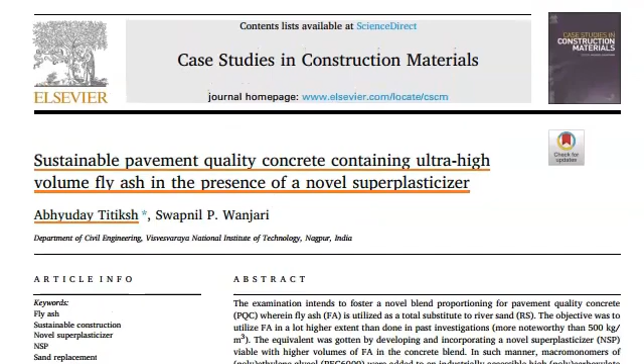Excellent, very good. Based on my initial thought with you, I think you have developed some excellent admixtures and use of fly ash, and you are also holder of one of the patents. So I'm very excited to know more about your research work and what you've done in the past. Maybe the best way to start is to give me an overview of what your research subject is all about. What do you do, and what does it cover?

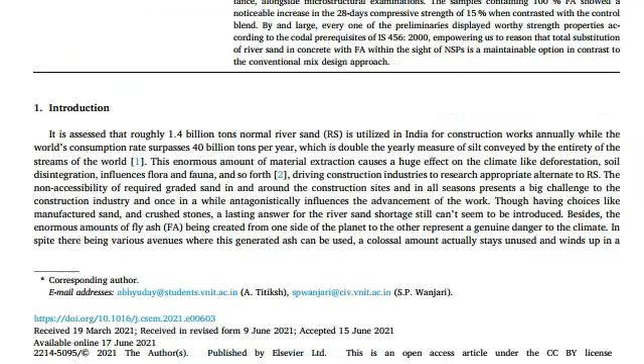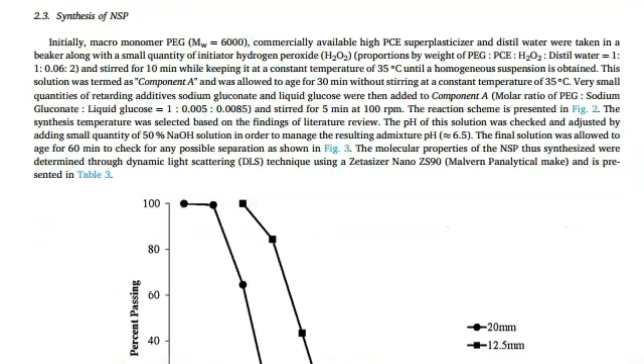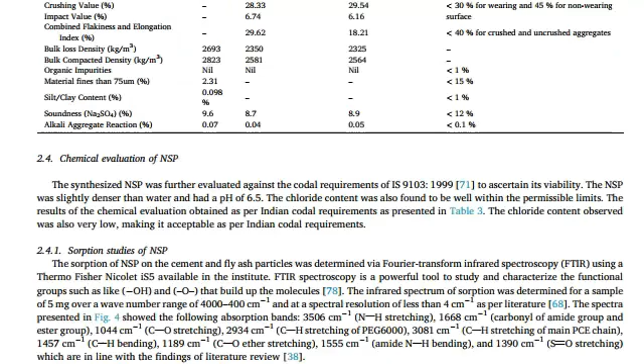To start with, you need to understand why I picked up this research idea. Many studies in the past have focused on incorporating supplementary cementitious materials, waste materials such as fly ash, GGBS, rice husk ash, and so on. But all those studies were either done by replacing the traditional ordinary Portland cement used for construction, or they failed to achieve the necessary strength requirement of concrete. So there was a general remark that if you replace traditional cement with these supplementary materials in a larger proportion, you will not get the required strength.

Then came the age of geopolymers, which was a revolutionary achievement at the time. But the practical aspect of geopolymers is still a bit blurry. Geopolymers are pretty costly, and the chemicals used for the geopolymer activator solution are a little hazardous. So when we address the practical applicability, the feasibility of this idea gets slightly contorted.

So my aim was to incorporate fly ash and bottom ash, which is a byproduct of thermal power stations in India, and not just replace cement in the traditional concrete mix, but address the issue of sand scarcity.

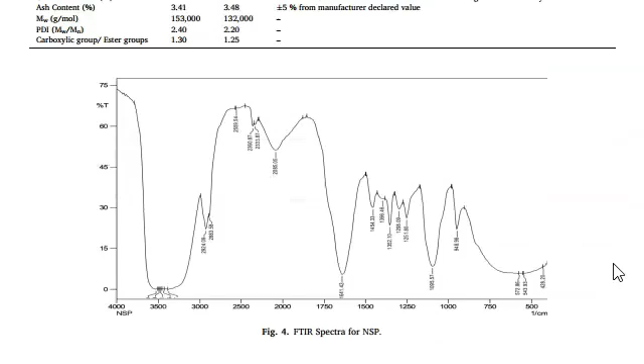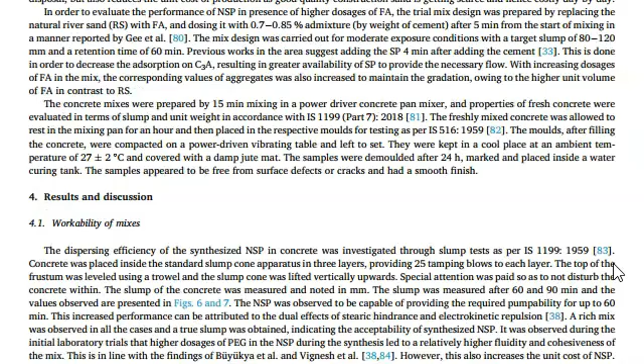In India, and I'm pretty sure this is implemented worldwide, for the past 10 to 15 years the Supreme Court of India has banned river mining because it alters the natural flow of rivers. Because of this ban, the cost of good quality construction river sand is rising rapidly, which led to illegal sand mining, the generation of sand mafia, and so on. Ultimately, there is a scarcity of good quality construction sand, which led to the increase in its cost.

On the other hand, huge quantities of waste being generated in India were still being dumped in landfills and so on. That needed to be addressed, because landfilling is not a permanent solution, as it leads to various environmental hazards. So I tried initial lab trials by incorporating fly ash and bottom ash in a traditional concrete mix as a replacement of natural river sand.

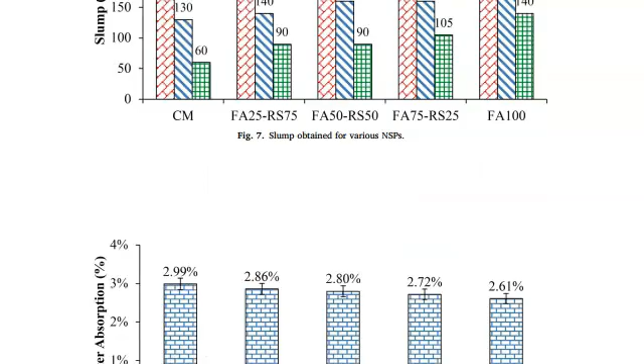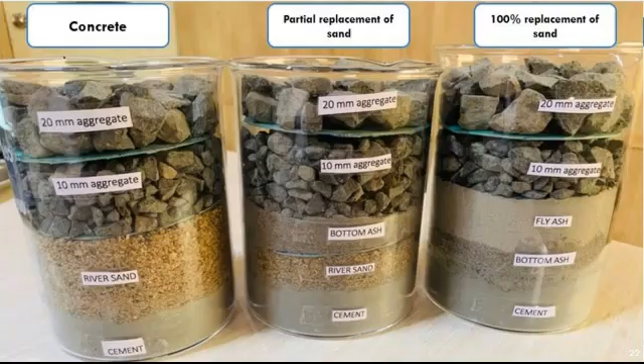But as observed in past studies, when I carried out the replacement for greater than 50% - meaning 50% of sand was replaced by ash - I observed a stagnating decrease in the overall strength, which motivated me to analyze the effect of admixtures. Admixtures are chemical compounds added to concrete to enhance its overall properties, both in the fresh state and in the hardened state.

So I analyzed multiple products commercially available in the field, evaluating them in terms of both concrete performance and chemical structure. I realized that if you increase the dry material content, or as we commonly call it, the solid content, of any polycarboxylate-based admixture, PC based admixture, its performance gets increased multifold. That's how the idea of my research came into practice.

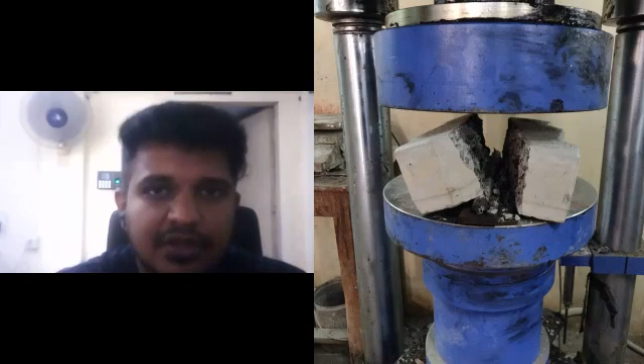I developed a new superplasticizer with a very high solid content that is not available commercially in the market. This admixture was then added to a concrete mix containing very high amounts of ash. In my mix design, I incorporated around 500 to 600 kgs of ash per cubic meter of concrete, which has not been achieved in the past in a commercially feasible manner. Geopolymers have done this, but they were costly.

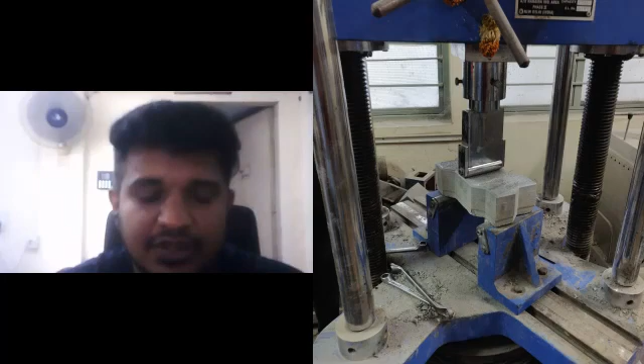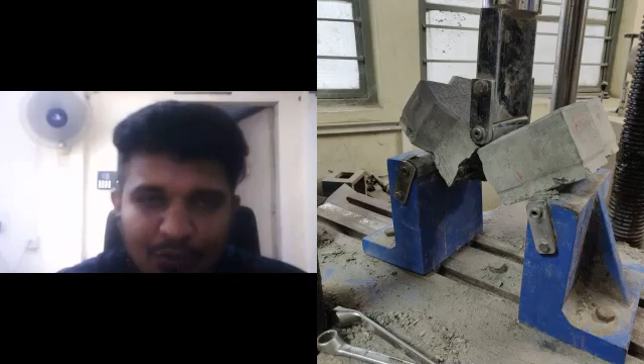On the other hand, with incorporation of my admixture and using ash as a substitute to traditional river sand, the overall cost of concreting was reduced by almost 400 rupees per cubic meter, which is almost 10 to 15% of the cost of concreting. So that's how it came in the market.

And that's very good, because apart from saving cost, it also adds to sustainability. It reduces the waste, and waste can be reused in construction materials, right? Exactly. We are not just disposing of the waste in this technology, we are actually consuming it in concrete in a commercially effective manner too. So it's a win-win situation for both.

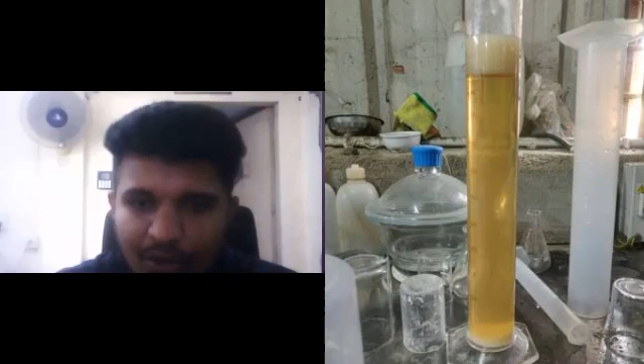The sustainability aspect gets addressed, the practical feasibility in terms of cost also gets addressed, and all it needs is a little tweak. You don't need any specialized machining equipment to develop this mix design. Any RMC plant, any ready-mix concrete plant working today all over the world can implement this idea. They just have to change the mix proportion, mix design, and incorporate a newly developed superplasticizer, or as I call it, novel or new generation superplasticizer.

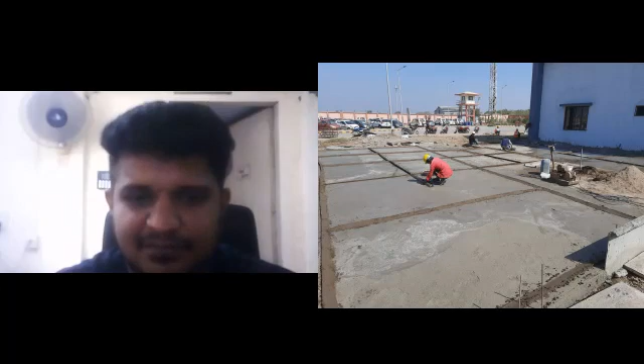So tell me, how did you plan your research? Great idea, I think it will make a big impact on many fronts. It will save the cost, it will actually result in usage of waste, solve a lot of problems, reduce the load on landfills, and provide some downstream economic benefits to the power plants as well. So a lot of good things.

But in a research environment, you need proper planning. So how did you go through the process of identifying the problem, planning your research, and reaching a logical conclusion to your assertions? Exactly. To begin with, I carried out some literature review to find out the gaps I just mentioned: high cost and scarcity of river sand, effective utilization of ash in the country, and so on.

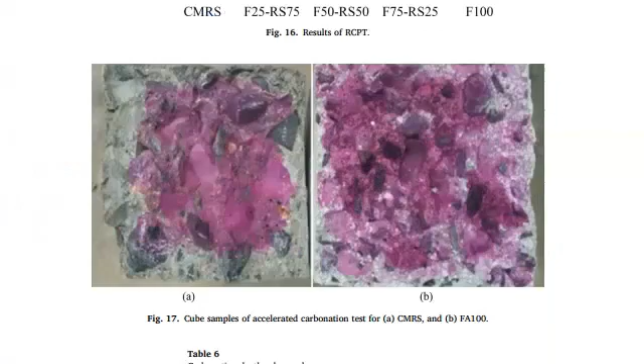So after finalizing the research lacunas, I initially started laboratory experimentation on paver blocks. Concrete M40 grade paver blocks were developed, and as I said, initial lab trials were a huge failure. I was not able to achieve the required strength even after 90 days. In terms of concrete, the 28-day strength is actually the required compressive strength, and I wasn't able to achieve that even after 90 days, which was pretty discouraging.

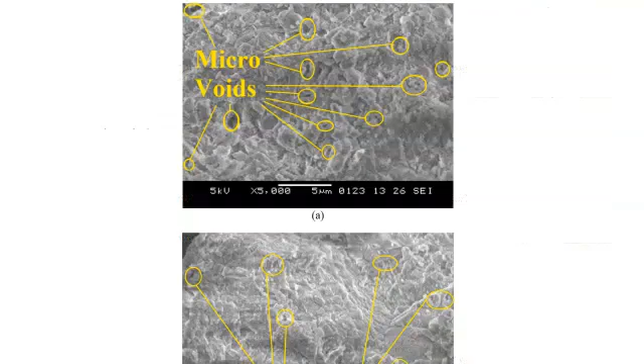But further literature review also revealed some interesting things, that adding certain chemical additives helps. One I'll name is polyethylene glycol, PEG; others are listed in my publication as well. PEG is a very commonly occurring material, also used in food processing and drug manufacturing industries. But if you use heavy molecular weight PEGs, with molecular weights greater than 6,000, these products actually increase the curing potential of the component.

These PEG components act as internal curing compounds when added to concrete, and since they provide curing from within the concrete itself, the rate of strength gain was observed to be higher. Using this and some other additives from my literature review, I started experimentation with developing a new superplasticizer. I picked up a commercially available superplasticizer and started building up on it, carrying out free radical copolymerization of PEG along with the commercial product, in presence of other retarders and additives added to concrete. I developed almost 400 to 500 different proportions of admixture and arrived at the one optimized and best suited for concrete containing very high proportions of fly ash.

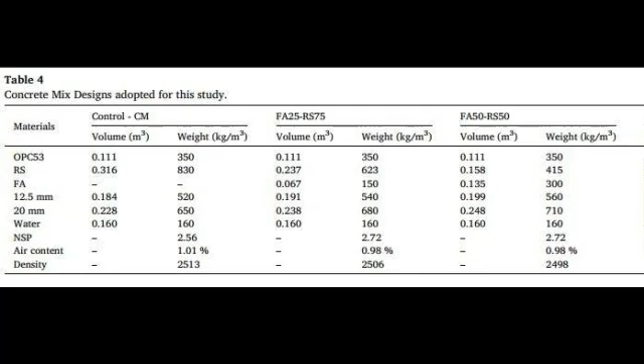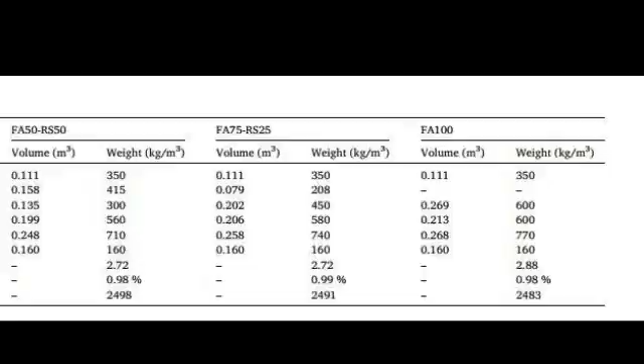After developing this, I again carried out the experimentation with paver blocks, and observed a very drastic change in the results. Prior to adding this superplasticizer, I wasn't able to attain the strength even after 90 days, as I explained earlier. However, using the same mix design, the same quantity of cement, and just replacing the conventionally used admixture with the one I developed, I was able to attain the target strength within 3 days, which was very good in terms of technical performance.

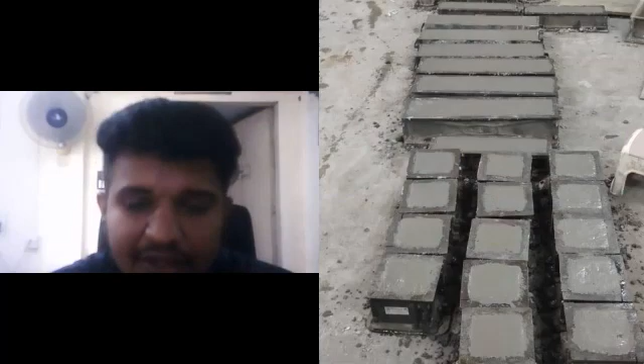So once this was achieved, I also carried out case studies before finalizing the objectives of my PhD topic. Up until now were the trial studies I carried out, but once the pavers were a success, it also got accepted in the market after the case study I did. It was carried out at Ultratech Industries in Butibori.

It's actually a place near Nagpur, and Ultratech Industries is a large-scale manufacturer of paver blocks. So we proposed the admixture to them and asked them to carry out a case study. And when they were happy with the results, we moved on to concrete pavements.

That is where the actual magic happened. When I incorporated the new generation admixture, I was able to not just consume a very high quantity of fly ash and bottom ash, I was also able to reduce the overall cost of concrete production.

So it's actually a multi-fold benefit. You not only address the issue of sand scarcity, you not only make it commercially viable, you not only make it sustainable since you are consuming large quantities of ash, but combined with all this, you are also reducing the carbon dioxide emission from concrete production.

Since you are using very high quantities of fly ash and bottom ash, which are pozzolanic materials that contribute to the strength, I also observed that I could reduce the cement content of the mix, which is not only environmentally efficient but also cost effective in nature.

Multiple field trials were also carried out after successful laboratory experimentation. I evaluated my developed concrete containing the new generation admixture for almost 1.5 years to ascertain the long-term behavior aspect, not just physical and mechanical properties, but also durability properties of the concrete.

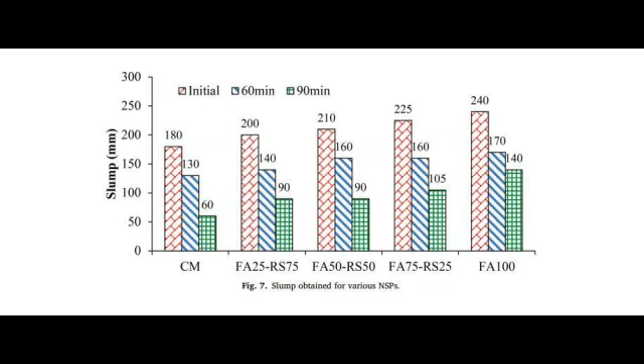Right now, we are in consultation with Balco, that is Bharat Aluminium Company in Korba, and various other NTPCs and power stations also, who want to undertake this case study.

Under the supervision of my PhD supervisor, Dr. Swapnil Vanjari, I am undertaking multiple field visits as of today. We basically go to the power plants and tell them about the idea that you can utilize the ash in this high quantity, and you just have to add so and so component.

This admixture that I developed, you have to tell them how to produce it, how to incorporate it into concrete, and that's it. Multiple case studies will follow. As I said, 2 are already completed, 2 are in the pipeline, and at least 4 or 5 are in talks.

I'm hoping we'll be able to conduct more field implementations, and based on the results, our goal, mine as well as my PhD supervisor's, is to get this technology, this idea of incorporating ash in concrete, incorporated into national codes. We'll be trying to get this idea written down in various IS as well as IRC codes.

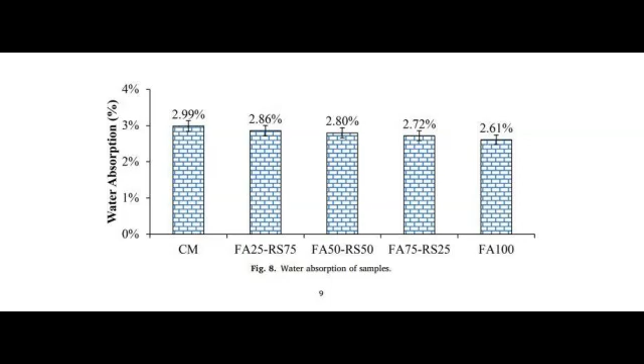And when it gets published, I know it's a time-consuming process, but when it gets published, everyone in the market, everyone in the construction industry sector, will benefit from it, as well as huge quantities of ash will be required.

So, if you're telling someone that whatever work you are doing, here's another way to do the same thing, but it will be cheaper, everyone will jump to the cheaper alternative. And since it is also environmentally efficient, this idea will also be supported by the government. So it's a win-win situation for all.

I'm praying, I'm hoping that this idea, once it gets kicked off, will actually solve the dire issue of effective ash utilization, not just in the country, but all around the world, which will be a huge win in terms of the environmental war we are fighting today.

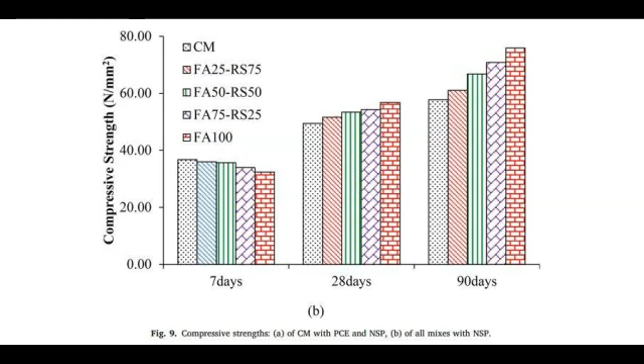Very good. Now, I think what you're referring to is scaling up. You have an idea. What I like about your work is you took an idea from concept. Initially, it didn't work for you, but you never gave up. You did multiple, about 400, admixture combinations, and then honed down into which works. So you did optimization on the lab scale, and then went into the field and did field trials with partners for the paving industry as well as the paver industry.

And then you have partners on the upstream side like NTPC who can supply you with fly ash. You have your super novel admixture, and then you can convert that into a really scalable solution for the market.

So my next question to you is this: you mentioned various partners, right? You have Dr. Vanjari helping you out, all the industrial partners. It's very good that people are helping you out, and you're getting good traction. Good job on that. Congratulations, not many PhD students are able to do that. Very proud of you, and good job. Thank you.

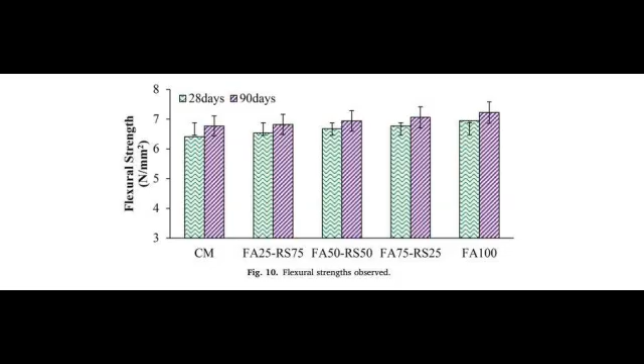So imagine if we need to get to the next scale. What are the scalable objectives, or how big can this be? What kind of change do you foresee in the industry, and what sort of infrastructure do we need? These are all still lab tests and field trials. We still need manufacturing and upstream investment for manufacturing of admixtures. So there is investment and infrastructure required on the upstream side, as well as on the downstream implementation side. What sort of things do you have in mind for these to actually materialize?

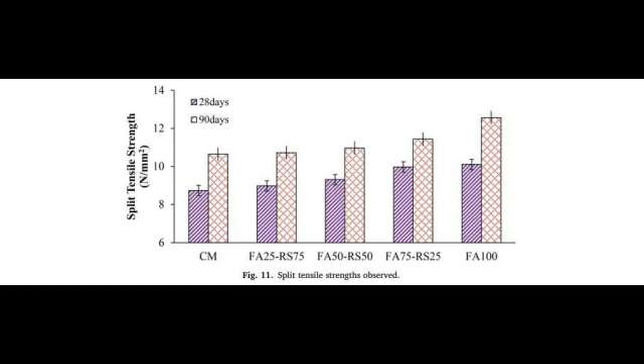Okay, for upscaling this, let me first talk about the advantages. For example, if you are developing a 1 kilometer stretch of 2-lane concrete pavement road, the approximate consumption, if you are using 500 kg of fly ash or bottom ash per cubic meter, will be approximately 1,000 tons per kilometer. This will be a really huge step.

1,000 tons of fly ash in just concrete. Other ways we consume fly ash are soil stabilization and backfill material, and so on. Those materials will be there too. This will be an additional advantage of 1,000 tons per kilometer stretch.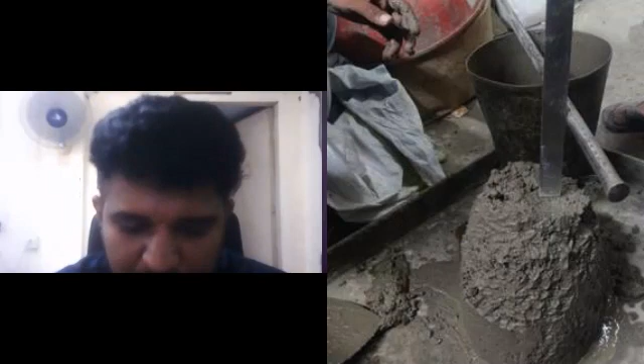So the first avenue when we upscale is that NTPC and other industries and stakeholders that develop fly ash and bottom ash can actually root out a map, and just like cement is being marketed right now, they can also market fly ash or bottom ash. So a waste that is currently being disposed of in landfills can actually generate some revenue for the country and contribute towards the GDP. So that will be the first thing.

The second thing, as you said, what will be the overall range, the overall market cap when I propose this idea? I'll talk about a multinational company named Fosroc. I don't know whether you've heard of it, but Fosroc, BASF and Sika are actually some MNCs that are leaders in the field of admixtures all around the world, doesn't matter whether it's India, Canada, US or whatnot.

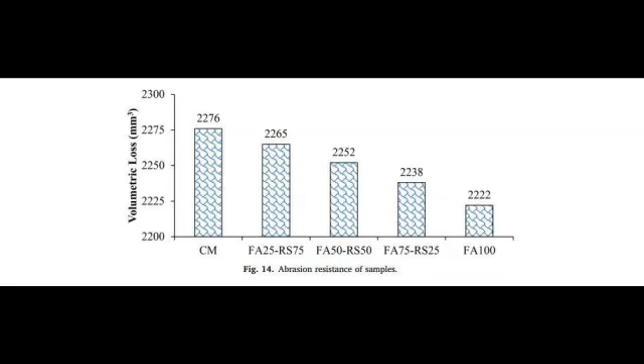These are multinational giants, and they overall control the market as far as concrete admixtures are concerned. So my aim is to tie up with these companies, or any other construction chemical manufacturer, and upscale my idea. As of today, the most I have developed is 100 kgs of admixture per batch. I didn't have a huge setup, I was working in the college laboratory, so my scale was limited. But when we talk about these commercial manufacturers, the scale is limited only by the sky. They can produce vast quantities of this admixture and supply it not just pan India but pan world.

They can supply it all over the world and market it effectively, and the overall revenue, as published somewhere on the internet - I don't actually recall the source, it's a report from Reuters - they estimated that by 2030, the overall chemical admixture market will be around $20 billion US. So once this idea gets implemented, this market will be my prime target. I'll be aiming to tie up with commercially available manufacturers and promote it on a larger scale, since the case studies will be a success by then - they already are, but multiple others will be carried out.

Since those studies will be a success, my work will be to start from the retail sector and upscale my work to large scale projects as well, such as construction of roads and dams, and use this admixture along with heavy quantities of ash.

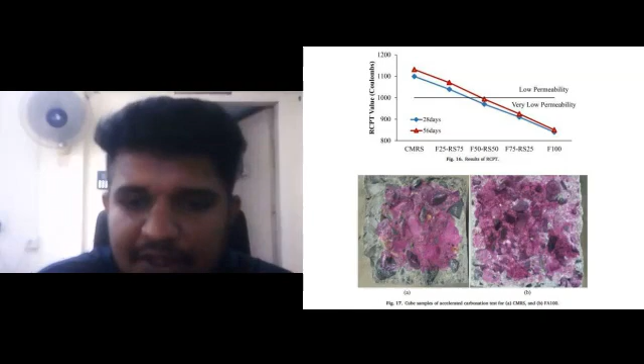So that way, the market sector we already talked about will be more than $20-30 billion, and the consumption of fly ash will be so much that almost all the ash currently being generated today will get utilized. Moreover, the ash lying as legacy ash in ash dikes all around the world will also be getting pumped out and marketed. So revenue can again be generated from waste by the country.

Very good, very good. Now you also mentioned that you have done some work on patents for these. So explain what that patent is all about, and what does it cover?

Well, actually, we have filed 2 patents. The first one is basically a patent on mix design. When I said I am incorporating fly ash and bottom ash in a quantity equivalent to 500 or 600 kg per m3, we had to tweak the concrete mix design a little bit.

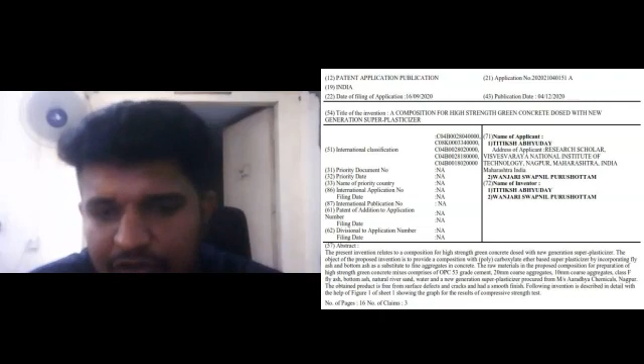In a conventional mix design, for any concrete, the aim is to minimize the interparticle space, or the void spaces in between the particles. You use aggregates or stones, and to fill the gap between the stones, you use filler materials such as river sand. The cement is actually the binder which holds all these sand and aggregate particles together. The complete aggregate and cement matrix as a whole is what we term as concrete.

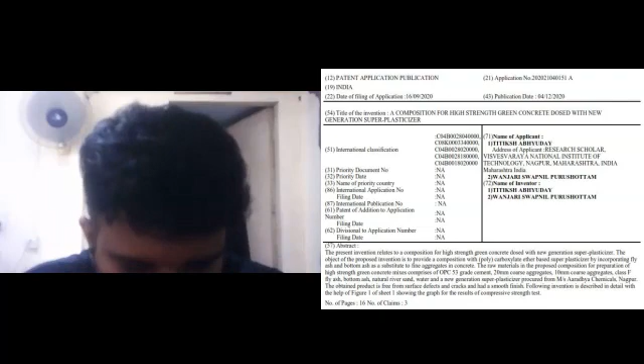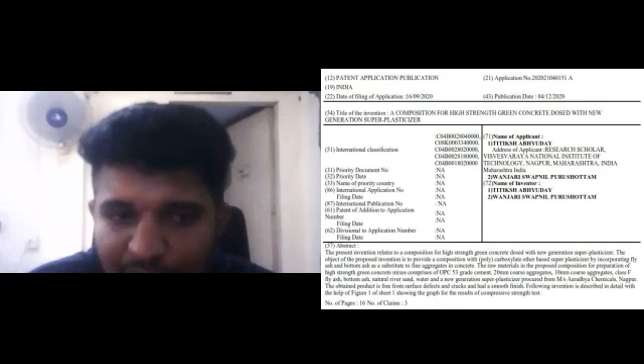However, when you eliminate the filler material, that is the river sand, you have to use an equivalent product to act as filler. But when I use fly ash and bottom ash, the overall fine content increases almost 3 times. In that case, the concrete kind of loses its homogeneity and its dense interpacking structure. So you have to tweak the mix design a little bit, incorporating a varying proportion of aggregates and so on.

And that is what the patent is about. We developed a new mix design and filed a patent for it. But since the patent is in my name as well as my supervisor's, we are also advising others how they can do it as well.

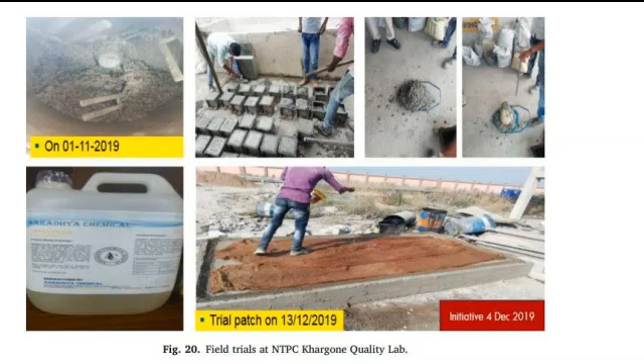See, if a patent is considered, it gets sold off or auctioned off. You cannot just give away the patent itself. But you can always educate people. Since we are an education institution and I am a research scholar, as part of our education outreach program, we are encouraging other people to work on the same area and develop the mix designs themselves.

That way, they won't have to rely entirely on the patented technology. They won't have to buy it at a very high cost. They can also use it or develop it on their own. On the other hand, this patent also gives us an academic edge. As a PhD scholar, it will help me in the course of my dissertation work, since I have a filed patent and have developed a new technology that has not been discovered or invented till now.

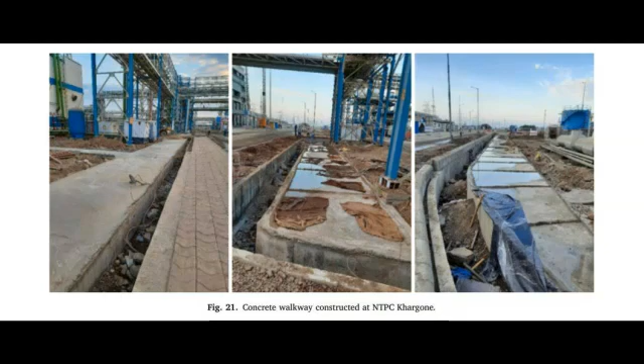So that was the aim of the patent. The other patent we filed was on admixture, and that is very interesting. As I said, my aim is to partner with commercially available manufacturers. So if those partners agree, I won't be selling off my patent. I will be a part of that enterprise.

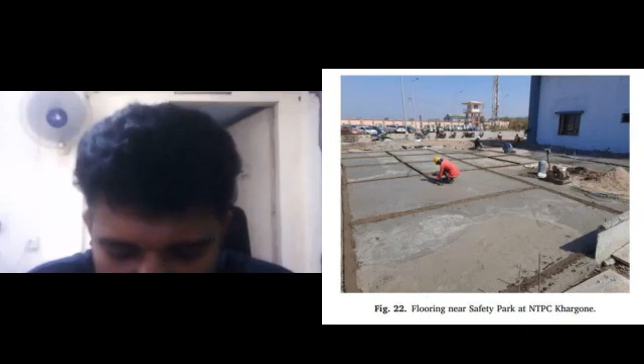I want to nurture this idea, since I was the one, along with my supervisor, who developed this admixture. I saw it from the very beginning when it was just in a test tube. I want to see it grow and be manufactured on a large scale, so that it actually contributes to a country's development, or the world's improvement as such.

Very good, very good. So what's the status on the patents? Have they been awarded? Sir, both the patents have been published and are currently under scrutiny. They are available online if you search for either the content of the patent or via the patent number itself.

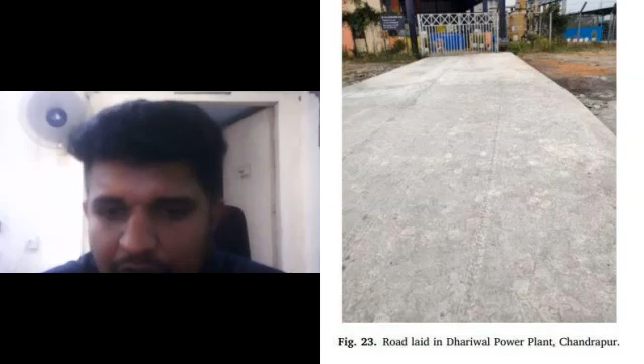Once the FER, the first examination report, comes out, then they will be granted. So I'm guessing it will take another 6 to 12 months and they will be out on the market.

Very good, very good. So what's next for you? You've done such great work in a very short period of time, covering not only your lab work, analytical work, and field work. You have a host of publications to your name, more coming in the future I'm assuming, and a couple of patents in the pipeline. In 3 years, you have done a huge amount of work. For a PhD scholar to do this is great. Very good, excellent, proud of you, and great work.

So what's next for you? Where do you see yourself personally moving forward?

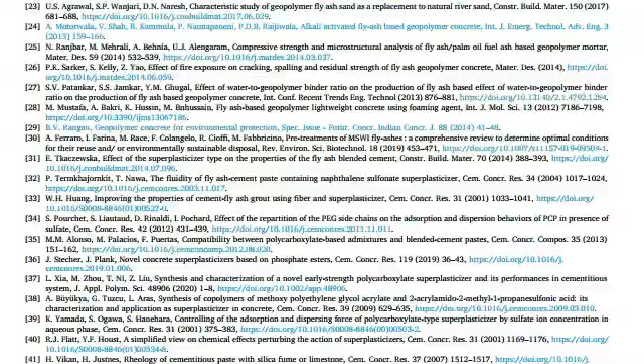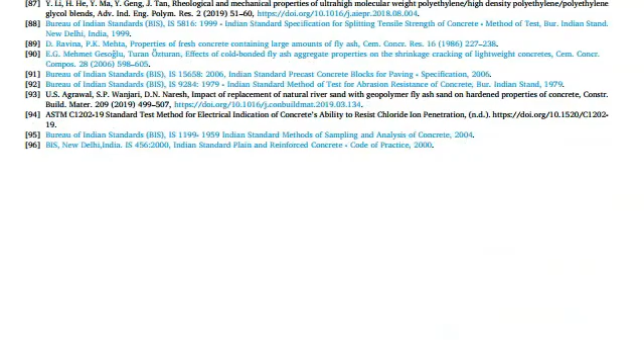My aim is not to just continue with academia. Of course, since I'm a research scholar, I'll be somehow related to the academia industry as such, via outreach programs or educational conferences—I'll always be linked to this industry. However, now I have a more broad mindset. I'm not going to be limiting myself behind a chair. I've been a professor for almost 8 years, and as noble a job as being a professor is, I feel I can actually make an impact if I go out as a freelancer in the field. So I'm actually planning to grow a startup once I pass my PhD.

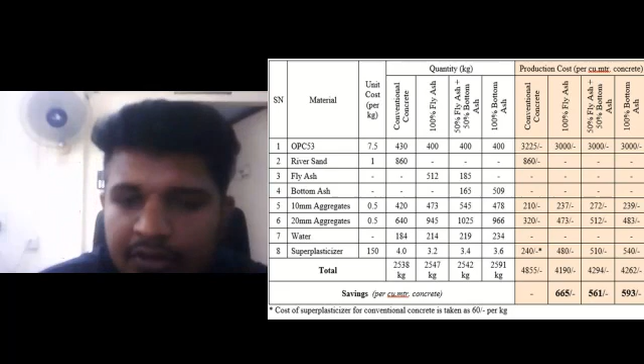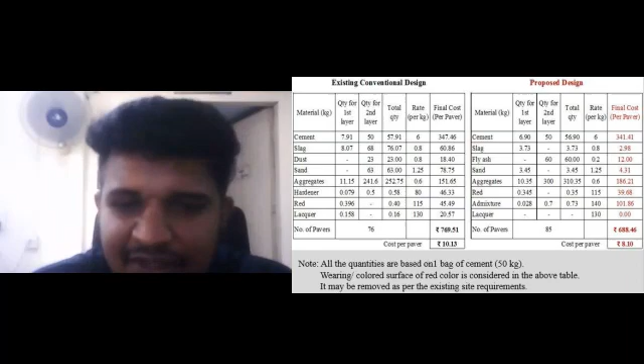Tying up with commercially available admixture manufacturers, the idea will always be the same. I'll be the one governing the quality control aspect of any admixture generation or mix design consultation that a client does. I'll be the overall in charge of quality control, and the partners that I hopefully have in the future will be in charge of commercial manufacture. So that is my plan for the future. I'm hoping 5 years down the road, I'll have my own company standing proudly in the market and competing with leading manufacturers. So fingers crossed for that.

I wish you all the best, and I hope it really happens, because you have all the foundations, you've done all the hard work to get up to this point. So my best wishes are with you, and anything we can help with, do let us know.

That is wonderful. So thanks again, Tilej, for finding time on a busy weekend. I know weekends are not a holiday for a research scholar. You work 24/7. You're still working, still in the lab, putting your hours in. And it is not easy to remain motivated because you're a lone fighter, by yourself. You have to find a way to get up in the morning and change things and make it work. So it's not easy, what you have gone through. Congratulations, and I wish you lots of best time in the future for your venture, your startup, your publications. If it can add value to the world in terms of environmental footprint, reducing carbon emissions, changing the way we look at concrete design and admixtures, I think that'll be a boon. It will change the way we think about construction materials.

But I was quite lucky in this respect. I was blessed with a very nice person as a PhD supervisor. He was also my best friend through all of this. He held my hand and actually led me through the tough times. There were times when I was pretty close to giving up, pretty close to breaking down. I almost cried many times in the lab. And at that time, it was my supervisor who held me up.